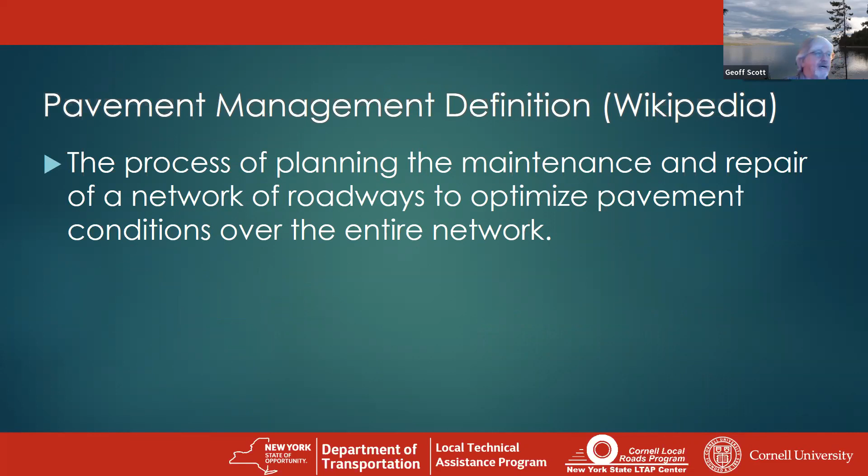Some history, not necessarily history about pavement management itself - people have been managing roads since roads began. But part of the history as to why it's gaining steam was back in 1999, the Governmental Accounting Standards Board, or GASB, issued Statement 34, which basically recommended government agencies report the value of their infrastructure assets on their financial statements.

They recommend basically that you would do this through a historical report for capitalized long-term capital assets. But as we all know, most local agencies don't really have a history going back too far in their records. So essentially they realized that, and they provided another method of doing that. And today we're going to be talking about some of that.

One approach is to depreciate assets over time. The other is a modified approach, which is what we're going to be talking about. That provides flexibility in reporting the value of the assets based on the use of a systematic, defensible approach that accounts for the preservation of assets. Essentially, pavement management and pavement management systems provide the tools needed to evaluate your pavement assets and meet the GASB 34 requirements.

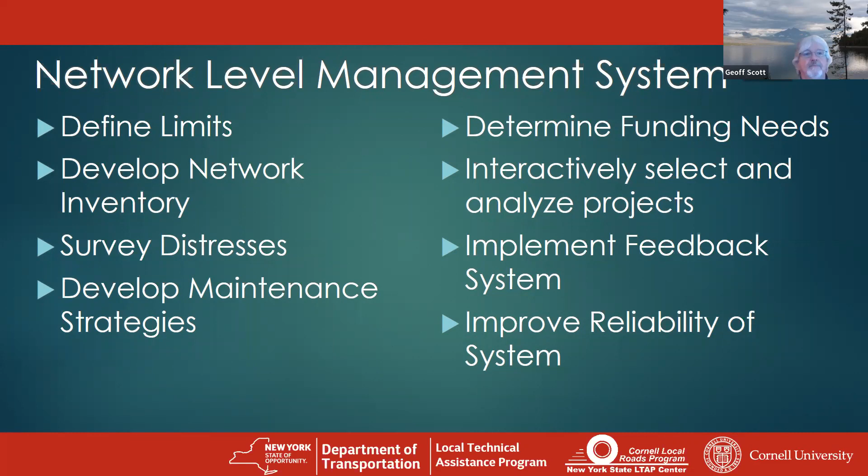As I mentioned, the project level is a little bit more site specific. Once that repair has been selected and scheduled for maintenance, a closer look at the project site specific needs are evaluated. These can be incorporated into the project planning for implementation - again, this is referred to as project level. The network level, as it says, is a network evaluation where it compares itself to itself, while the project level focuses on one individual project at a time.

So as I mentioned, everyone does some sort of pavement management system. A pavement management system is a planning tool used to aid pavement management decisions.

Many pavement management software packages can model future deterioration based on changes in traffic or weather conditions and make recommendations based on those anticipated changes. Measurements can be physical ground inspections, visual inspections from a moving vehicle, or automated sensors mounted to vehicles that measure changes in cracks from inside the vehicle. There's a variety of different types of software out there.

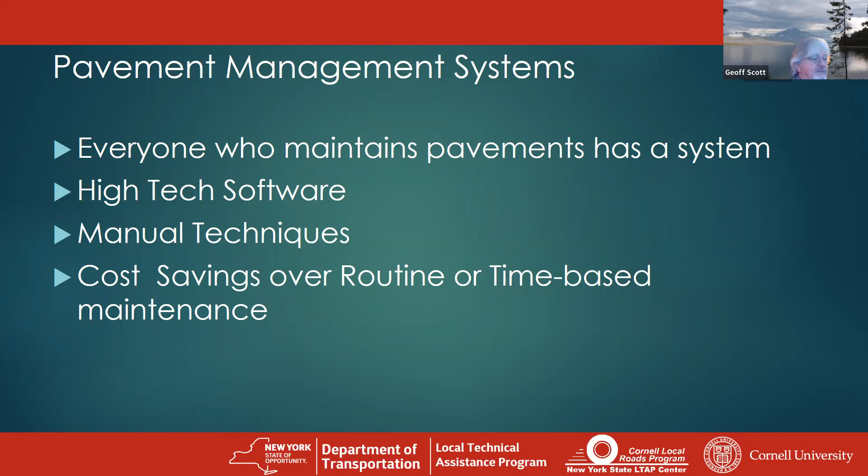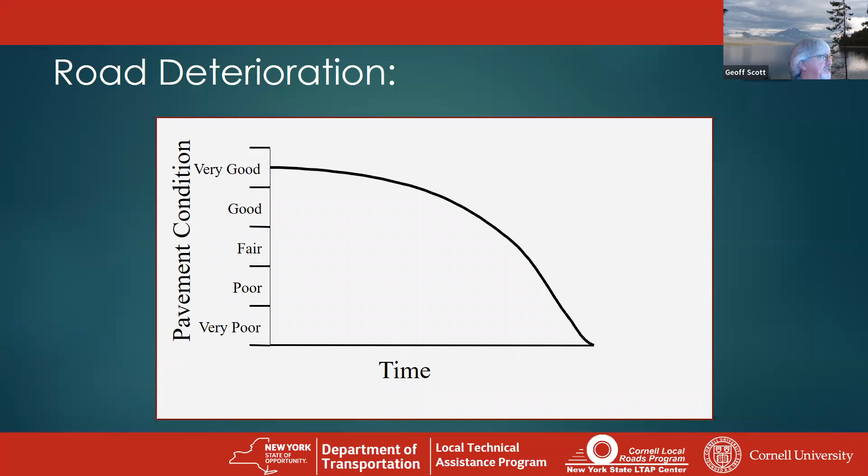We've got road deterioration. As with anything, as soon as you begin to use it, as soon as it's constructed, it begins to deteriorate. The condition of a pavement drops slowly over time. During about 75% of the time, you'll see roughly a 40% drop in quality. Based on the loading, the more frequent loading, the greater stress on the pavement. Surface and subsurface drainage, freeze-thaw cycles, and solar impacts can all cause that pavement to degrade over time.

Once you reach a certain point, cracks start opening up and the problems become more visual. Moisture gets into the base through those cracks and softens it. As traffic continues going over it, it causes the base to flex, which causes the surface to flex, and that's where cracks start. Once extremely soft, you'll start getting potholes, and the more and larger the cracks, the more moisture gets in, and the quicker the deterioration goes. In this graph you can see a 40% drop over the last 17% of that time, because the base is typically failing at that point.

One thing to note: during that 75% of the time, each rehabilitation technique costs about $1 per unit. Once you pass that 75% lifetime, rehabilitation and reconstruction costs increase to 4 or 5 times that per unit.

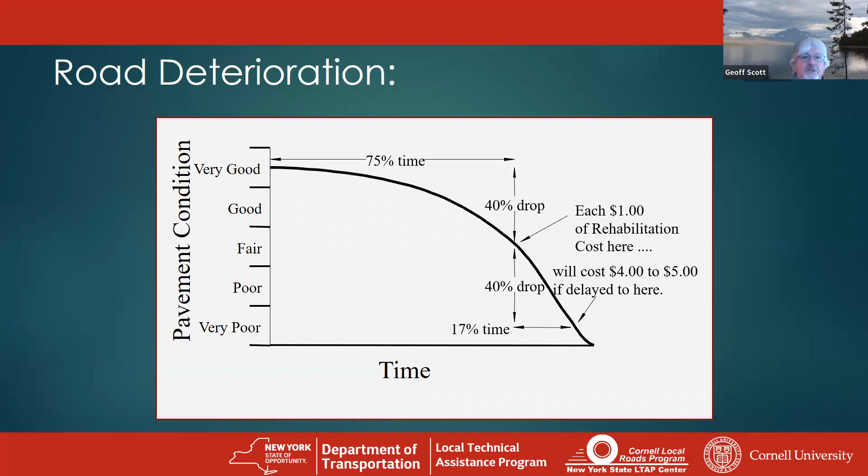So the goal is to try to keep those roads in good shape. Here's the worst first: routine maintenance, preventive maintenance, and corrective maintenance are all the more affordable approaches. When it comes to worst-first, you're letting that pavement fail and then spending a lot of money to fix it, when over time you could have just done smaller repairs.

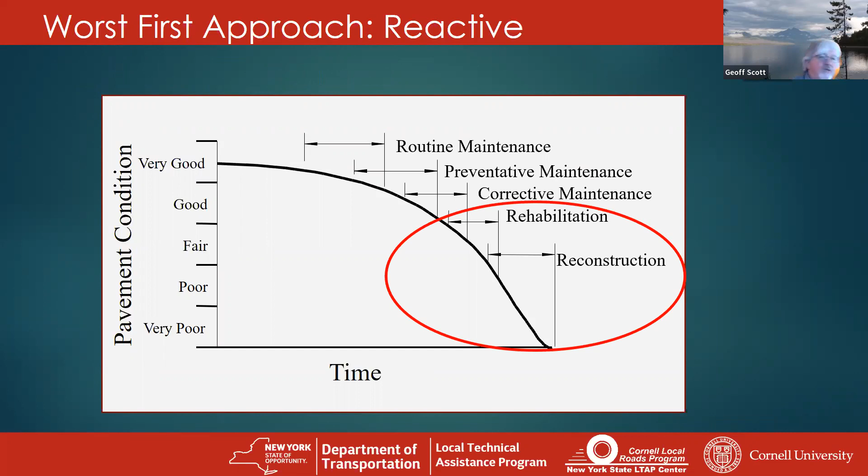To visualize this, we've got pavement condition over time here, and you can see how the original pavement condition goes down. They reach a certain point before it gets to poor, and they do another treatment, maybe a chip seal, maybe a slurry seal, maybe just crack sealing. Then a few more years go by, and they do another surface treatment or whatever it might be. The idea is to keep those roads in good condition.

By doing these smaller work projects, you spend $1 per unit on each of these, instead of 4 or 5 per unit down here once it degrades further. So incrementally, you're spending 3 units worth versus five times per unit here. You get more bang for the buck when you're using the material you have.

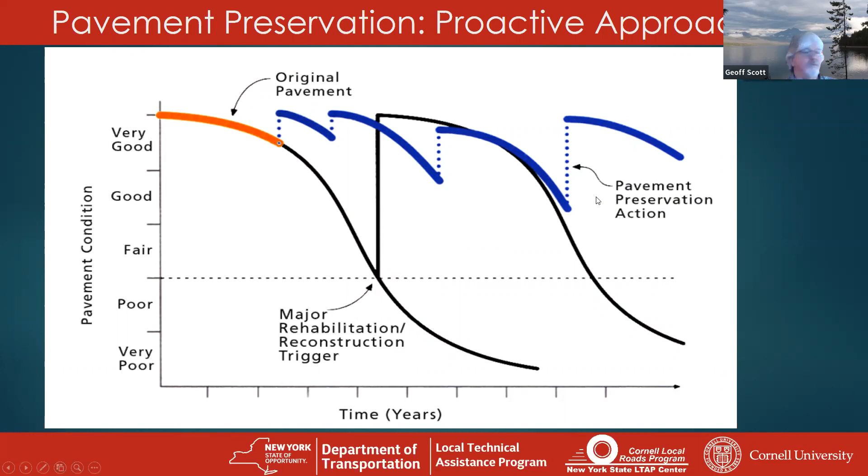As far as cost goes, preventive maintenance is just that: maintenance utilized to prevent an asset, in this case pavements, from failing. By providing treatments to extend the life of an existing surface and prevent it from failing before it reaches the end of its useful life, it's going to last a lot longer and you're going to save a lot more money. If the surface and base have not significantly deteriorated, relatively inexpensive treatments can be used to keep water out of the pavement, prevent oxidation, and maintain good skid resistance on those roads. It also keeps those roads better looking.

Over time, roads are going to eventually fail, but carefully selecting a timely application of a treatment for maintenance can keep the road in very good condition and extend that useful life. It's another way of looking at it, instead of fixing everything or rebuilding every time.

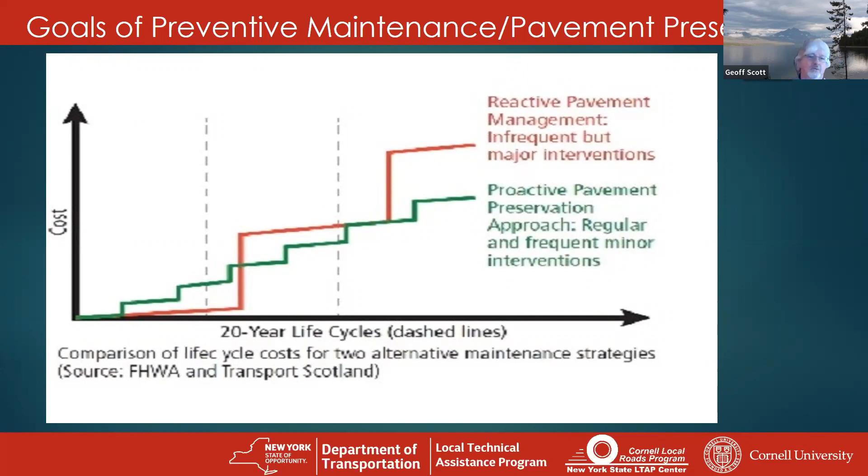I like to correlate a lot of this to having a roof leak. You got a leak in your roof. You don't want to wait till that leak gets so bad that you've got ceilings falling out and electrical boxes rusting and you've got to completely rebuild inside the house. What you want to do is stop that leak at the roof, repair it, and keep everything below it dry. Same concept with a roadway. Once that base gets wet, it starts to destroy and the costs go way up.

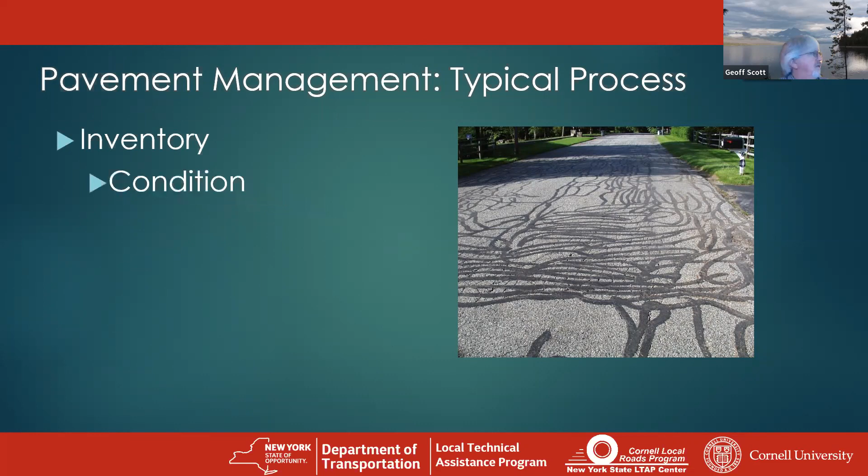There's several tasks required when you maintain a top quality pavement inventory, with the goal of sustaining an overall condition at desirable levels of that network. You'll use pavement preservation, but some of the steps you need to do are basically collect an inventory, find out what you need, do a condition assessment, find out what condition they're in, and then assign repairs.

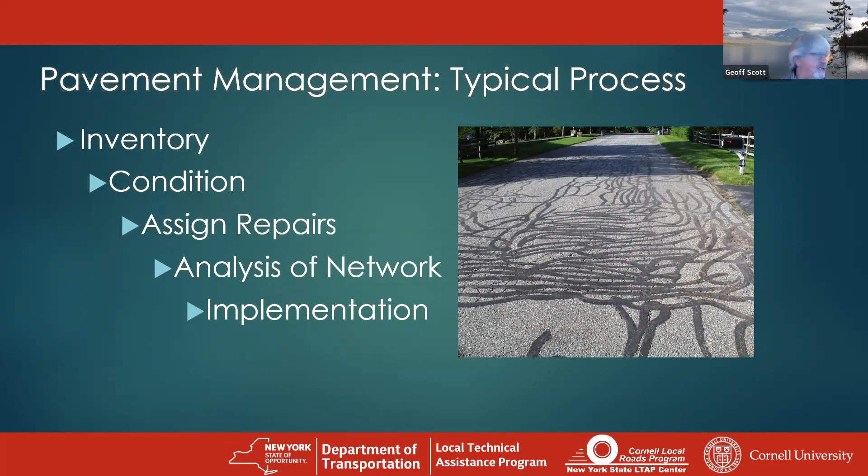Analyze the network, basically do an analysis of all the roadway networks, see what you have, and then you're able to put prices to some of the costs. From there you can start to determine what needs to be done, and then move into the implementation phase. We'll talk about all these coming forward here.

The inventory, you need to know what you have, as I mentioned. Most agencies have an inventory. They're required to submit that to the DOT annually. And if you aren't aware of exactly what you have or what your inventory might be, you can look into the local highway inventory, which is basically maintained by the New York State DOT.

In the past 10 years, they've used a lot of Google Maps and GIS and a variety of other techniques to basically map out and determine what the roads are in each agency.

But in some places, particularly high growth areas, they have developments popping up over time. They might take 2 or 3 years to build, but then those roads are turned over to the municipality. A lot of times the town boards, zoning boards, or planning boards don't necessarily convey that information over to the DPW or the highway department. So going out and doing a physical inspection or checking on what roads you have can be helpful.

It's been found through some of the agencies that some of the roads haven't been recorded on that local highway inventory. If it's incorrect, if you find there are roads that you don't have, let the state know. That's going to impact your CHIPS funding, and that's the important part. We need the funding. Again, check for recent changes.

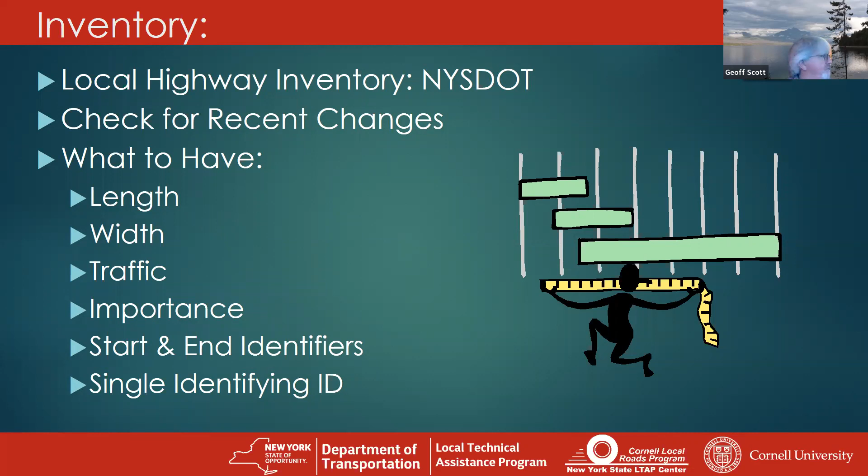Once you know what you have and what you're responsible for, you need to know the condition of each of those segments. Knowing the condition of each section will help identify where the problems are within that network. It will also allow you to compare road segments within the agency relative to each other to determine where repairs should be focused, looking to get the biggest benefit for the network and the community.

The process will help identify the types of distresses in each segment, and there are a multitude of different types out there. Functional conditions such as roughness and skid resistance are also considered. Structural capacity relates to the structure of the pavement itself. All these distresses should be evaluated. We've got a variety of different things, and some of them kind of go hand in hand with others. Depending on the surface type, whether it's gravel or paved, different distresses are used to evaluate.

Some of the distresses we use to evaluate include drainage efficiency, how well the water on and around the road goes away, longitudinal and transverse cracking, alligator or fatigue cracking, edge cracking, potholes, rutting, bleeding, and raveling. Each of these conditions is due to specific types of failures. So if you can identify what your distresses are, it's going to help you determine what repair is necessary.

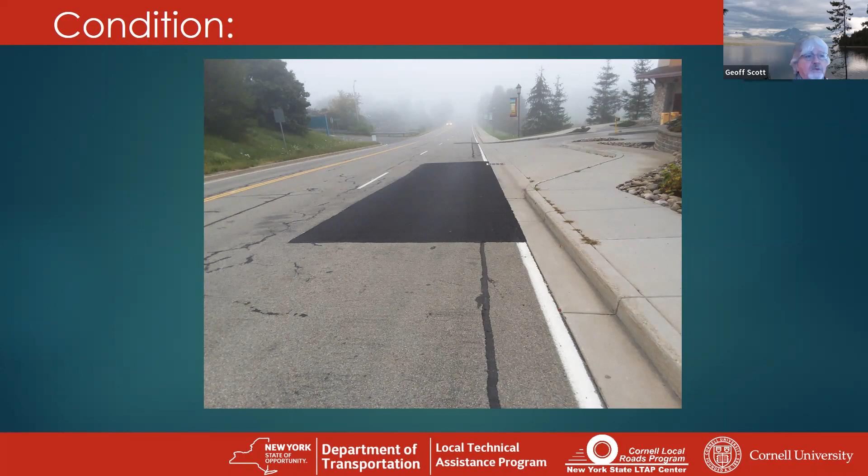That can be a little bit overwhelming, but there are options here. The Federal Highway puts out a distress identification manual for evaluating cracks that tells you the causes of them, how to rate them, and provides numbers for them. It covers concrete, asphalt, and a variety of different things. It's very useful and pretty informative.

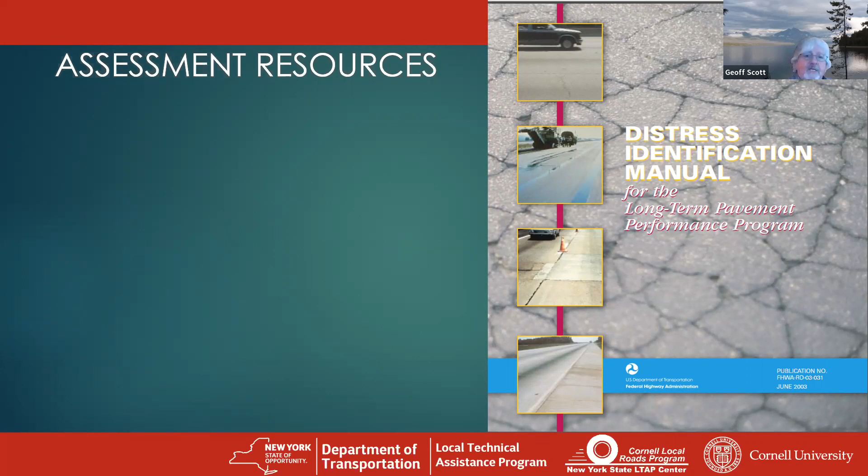And if you haven't got access to that, there's always the option to get a better understanding by taking a pavement maintenance course. This actually goes through a lot of those pavement distresses, pavement repairs, and causes, and gives you an idea of how to maintain your pavements—a useful course. Both of these manuals are available on that link in the handout, so just click the link to download those documents if you need them.

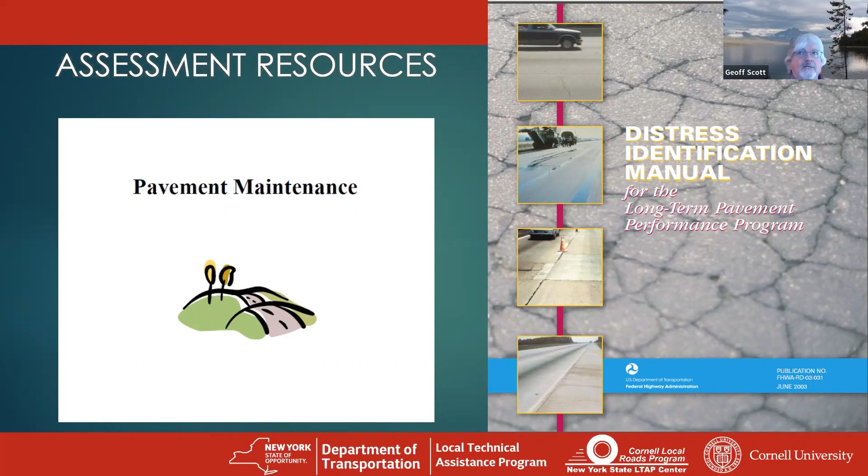Assigning repairs: once you know what types of distresses are present, a closer look can help identify the possible causes of each distress—whether load related, material or installation failures, or failures due to environmental factors. Understanding the cause can help determine a proper repair, and you want to fix the issue that's causing the distress. The greater the impact the proper repair can have on the long-term sustainability of that road segment.

Load related distresses can be improved with greater depth of support, either in the base or on the surface. Material and installation failures may need to be removed, but other practices may be able to correct them to a degree—it really depends on the distress itself and the situation you're in. Environmental issues, typically caused by excess moisture, can be addressed to reduce the impacts of a soft subbase or the deterioration of existing material. Each distress has specific causes.

So once identifying the distresses and looking at each situation, you can select the proper repair for each situation, and you want to try to fix the cause and not the symptoms.

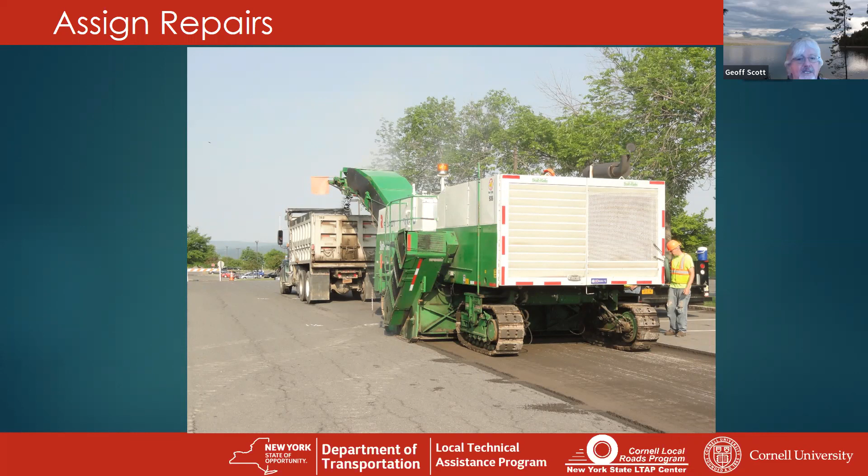Part of setting a priority is part of the evaluation process of necessary repairs. You need to have some sort of priority—you've got to determine which road needs to come first.

And then there's the strategy—whether it's routine maintenance, corrective maintenance, preventive maintenance, maybe an overlay, rehabilitation, or reconstruction—and that strategy is going to drive a lot of it. What we encourage is focusing on maintaining good roads in good condition, so the strategy value for a rehabilitation or reconstruction is going to be lower than the strategy value for a corrective or preventive maintenance. That drives a lot of the priority because you're multiplying that strategy by everything else.

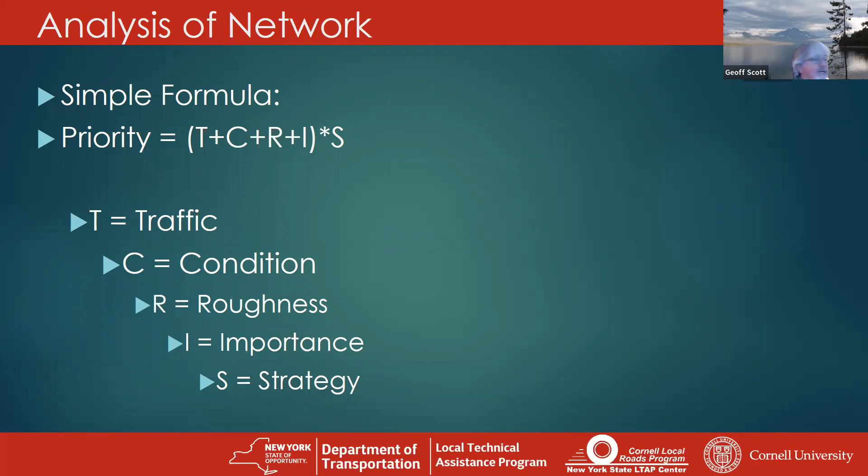It doesn't include any future deterioration, and it becomes extremely complex and a little bit out of hand for most of us. But it's easy to modify. So again, the idea is keep it simple.

Part of the implementation, once the road segment has been prioritized, cost estimates can be applied to each repair, typically done in unit costs, based on a specific unit, whether it's square foot or square yards. Each road segment needing that specific repair can be calculated. So you develop a unit cost, then multiply it by that square surface, and that gives you a generalized cost on what that repair is going to cost for that road section.

Several things go into this. By putting those together, you're going to determine which roads go first. A lot of times setting up that schedule is based on what available funds an agency has, selecting the higher priority roads and adding up the cost until you reach the available funding, which constitutes the first year. Then you go down through the next prioritized roads until you use up the available funding for the second year, and you repeat that for the third and fourth years. That's just a general way of doing it.

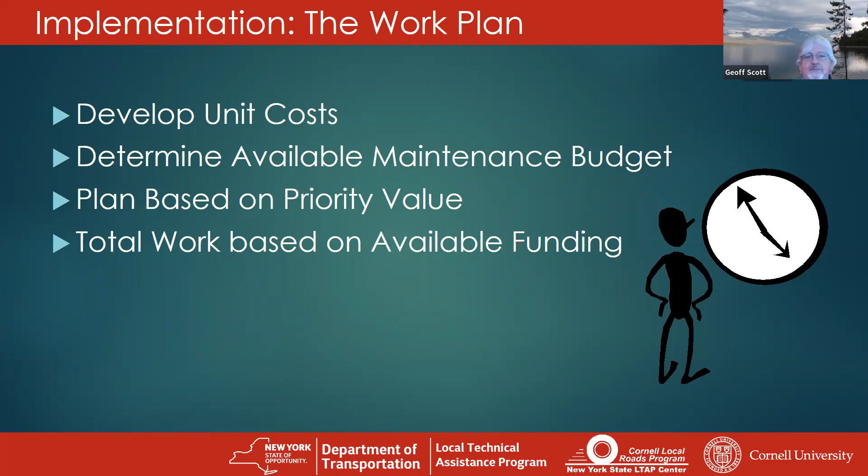Another part of the process is getting the work done. If the work isn't done, the entire process has been kind of a waste. But once you've got documented information - conditions, repair needs, repair costs - it helps you communicate with the board what needs to be done. Communicating what you want to do with the board can be difficult with a difficult board, and sometimes it's not, sometimes you have good boards out there too. But having that documentation, having the objective process in the evaluation, often helps buy-in.

It's a little easier. It's not just you up there saying, I want to do this. This is what the program's recommending, this is what we want to do, and this is why, and this is what it's going to cost. It's much easier for them to understand.

Again, scheduling the work - knowing what you have and what the plan is going to help facilitate the work, particularly with contractors, so you can work with their schedule. Do you want to schedule early? Have a plan in place. If you can get them lined up earlier in the summer, the better. What you don't want to do is wait till the end of the summer to try to schedule work for the current summer. Weather factors can severely change the scheduling, as we saw last year with all that rain. If you wait too long, performing work in the cold can severely reduce the benefits and survivability of a pavement.

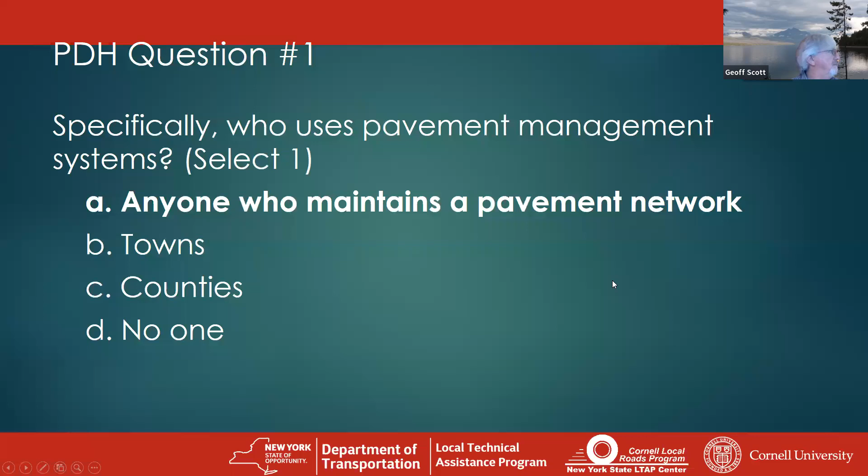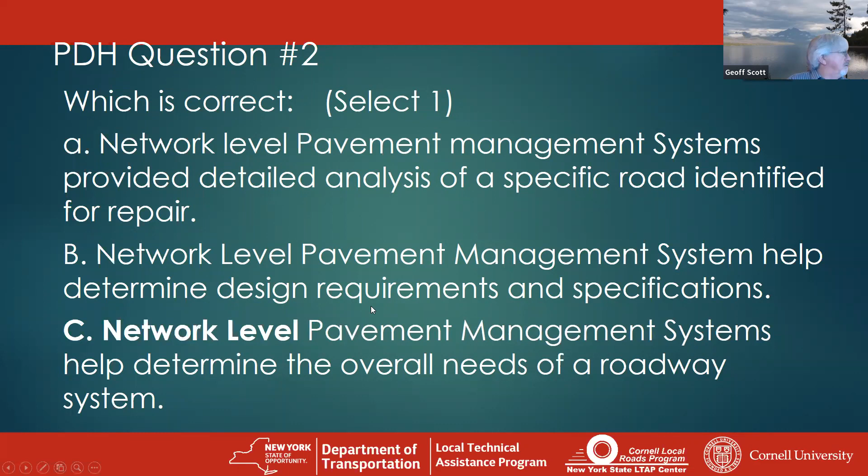So when it comes to funding and dealing with pavement planning, managing, and budgets, common questions you might get from elected officials are basically: do we have enough money? Well, typically that's a no in most cases. How much can we cut from the budget? Ideally none, but they're always looking somewhere. Can we defer pavement maintenance? You definitely don't want to, because the longer you defer it, the worse condition it gets. Once it reaches that rehabilitation-reconstruction area, prices escalate substantially. Then the big question: what repair should we do on this road?

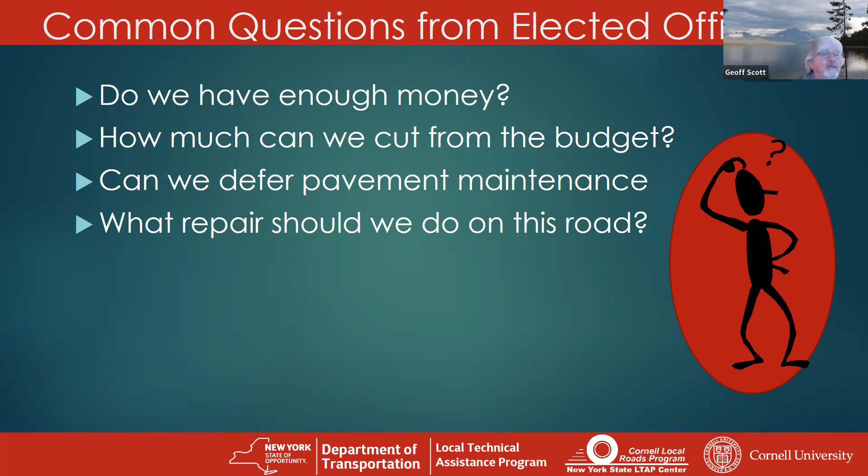And it really depends. You want to let the road tell you what its needs are, not necessarily just pick something out of a hat. And you want to fix the issue and not the symptom.

As far as implementation goes, there are roadblocks, obviously. If you've got a huge road network, as I mentioned, some of them break it into thirds or cut them in half as far as evaluations. But a large road network can be overwhelming a bit. Sometimes it may take additional manpower, and the size of the maintenance needs may require more maintenance than you can actually possibly consider, and that'll stymie it a little bit. Again, you've got to start somewhere. You just don't want to quit.

Complexity of the maintenance needs: if your roads are in really poor shape, they're going to require a lot of complex work and things to bring them up to snuff, and it's going to take a lot longer to get there. But again, you need to start somewhere.

Decision makers' experience: whoever's deciding on repairs to do, if they don't really understand what a reconstruction is and they do an overlay, they may fix the road for a little while, but you're just buying time. That road will fall apart again. If you don't fix the stresses below, they come back.

And other personnel commitments. Again, if you've got a small shop with 3 or 4 people on staff, sometimes it's difficult to get out there and do your road evaluations and assessments and come up with an inventory and that kind of stuff. So there are some issues as far as implementation goes, but again, we've got solutions for that too.

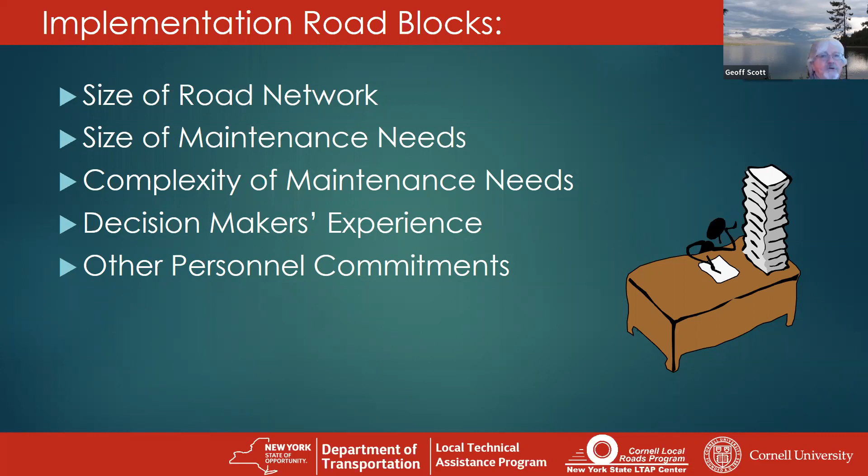What you really want to do if you're responsible for the maintenance of your roads is try to seek out a champion. Try to find somebody or several people on the board that are willing to come out and see what you do, see what roads you cover, see what issues you have to deal with. Get them to understand where you're coming from, and get their support behind you, get them involved.

Another means is basically to demonstrate what the network needs are. We're going to talk a little bit about that.

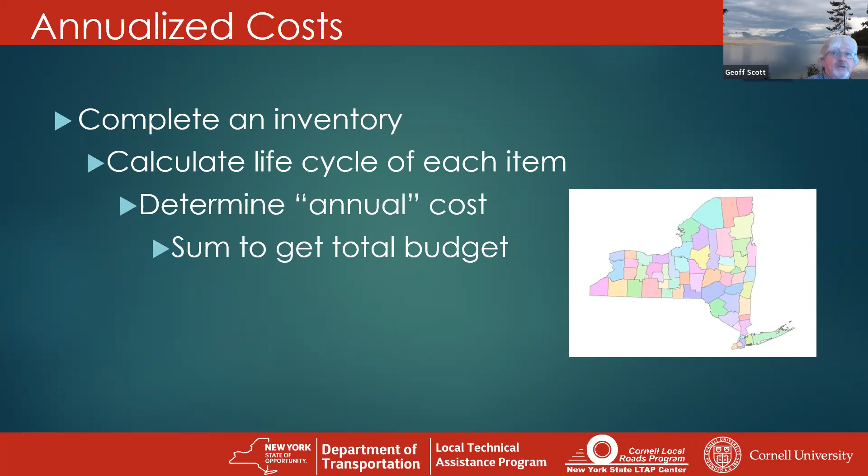So if you want to develop an annualized cost, basically try to figure out how much it's going to cost on an annual basis. You need that inventory, you've got to complete that. Calculate life cycle of each item, determine annual cost, sum the total together, and from there you'll get your annual cost. It seems easy, but it's a little bit more in depth, and we'll go into an example here.

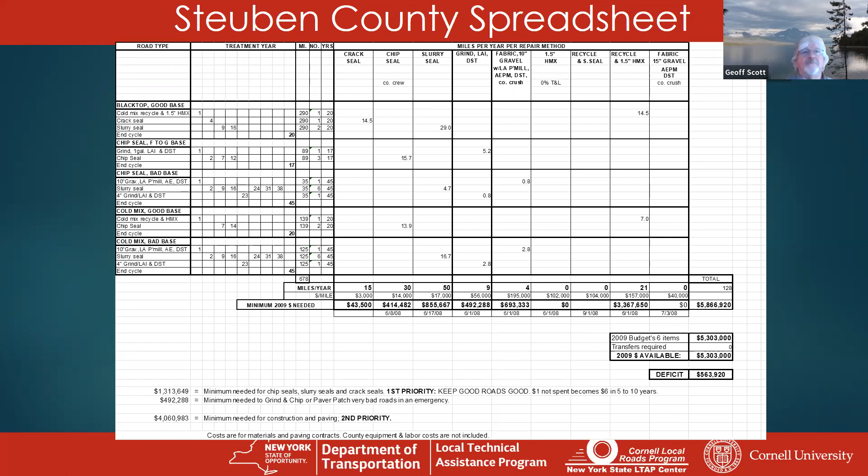So it's basically something they can share with their board. It identifies what their needs are, identifies what their deficiencies are, and identifies the plan. Getting all that on paper and documented makes it a lot easier to discuss over time. This approach can be used for all of your assets — obviously roads, but also bridges and culverts, signs, guide rail, equipment, and miscellaneous items. Again, it's about determining what you're going to need and being able to budget for it each year.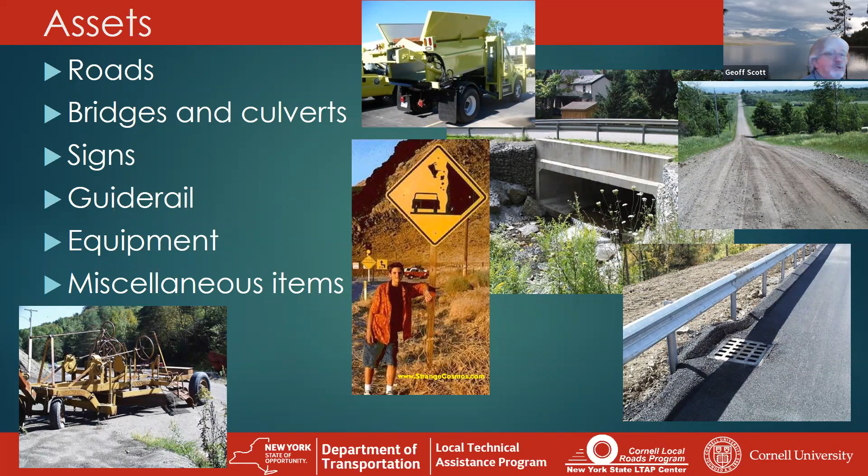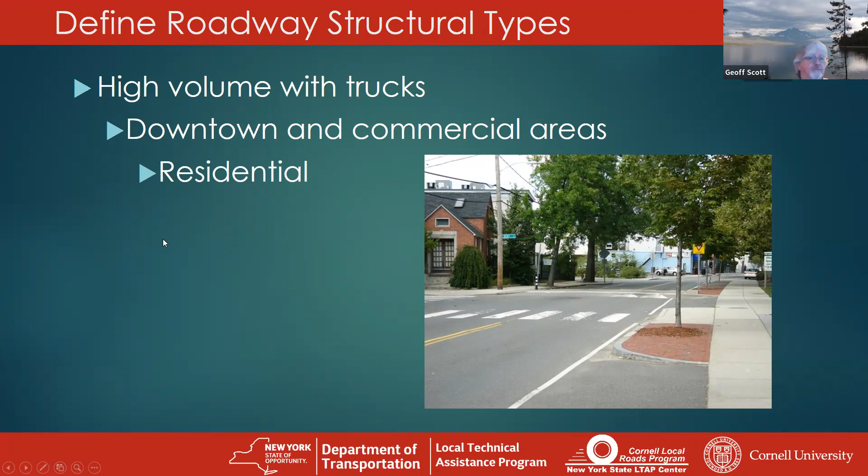What they did was define road structural types, since each one has a different strength and design. As an example, we're going to use high volume roads that have trucks, but other options might be downtown commercial areas or residential roads. Each one needs a little bit different type of design. So using those numbers from before, we've got a high volume road with trucks on it.

Again, we're developing an average cyclic plan here. The cycle life is approximately 35 years. These are the treatment years for each of the repairs: crack repairs in year 5, patching year 6, wearing course year 7, crack repairs again in year 9, overlay in year 10, crack repairs in year 15. You can see the years basically go 1 year, 1 year, 2 years...

Then they go through an overlay in year 10, so 1 year, and then they go back 5 years, doing crack repairs and patching at the same time. Then they put a wearing course over it, and they can recycle the surface and go back. That's their cyclic maintenance plan over that 35 years.

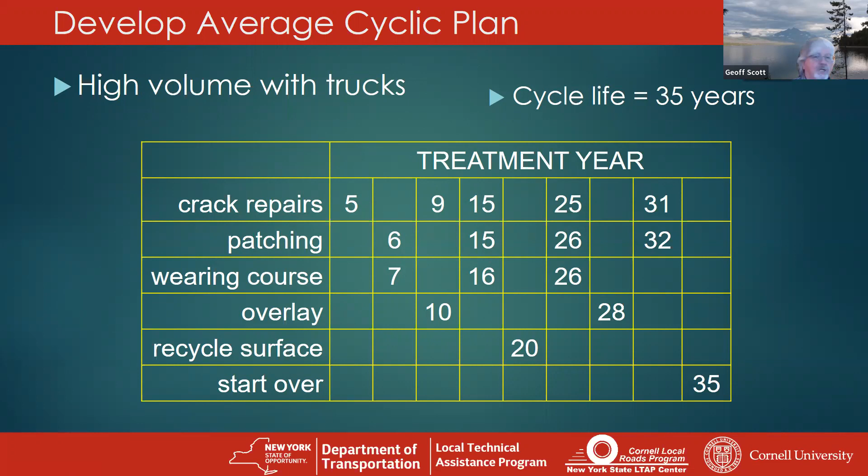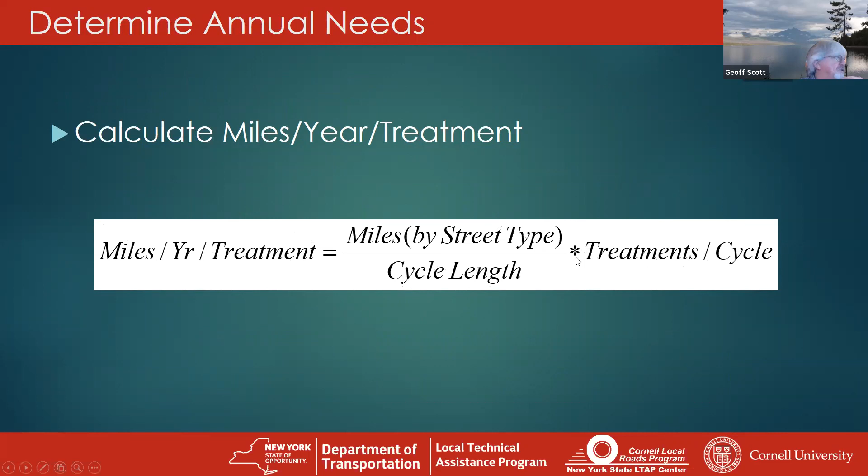From that, you can actually put costs to it. You want to calculate how many miles per year per treatment. The equation is: how many miles you've got by street type — again, roads with heavy trucks — what's your cycle length (35 years), and the number of treatments during that life cycle, multiplied together.

So what they've done here for high volume roads with trucks: 30 miles with a 35-year cycle. For those roads, you've got 5 crack seals averaging 4.3 miles a year, patching 3.4 miles, wearing course 3 times, overlay 2 times, recycle surface 1 time, reconstruction 1 time — all expressed as miles per year, breaking it out over that 35-year period.

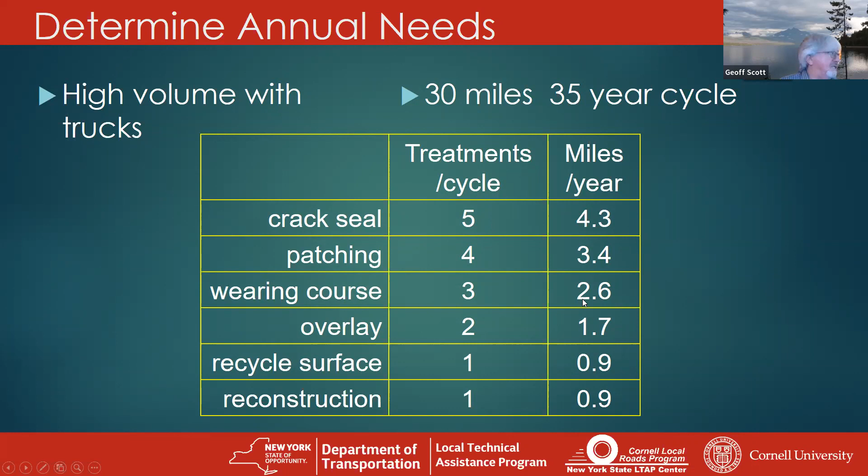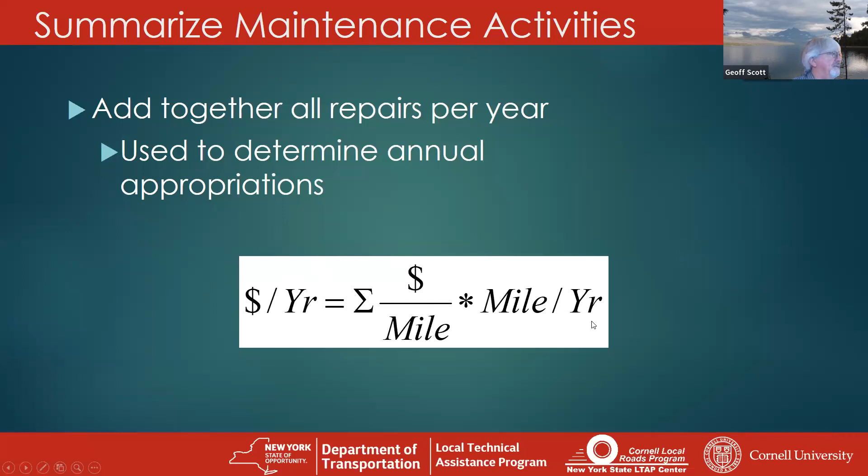From that, you can add together all the repairs and use this to determine your annual needs and appropriations — determining the cost per year. Then you sum up the cost per mile and the number of miles per year, as shown in this table: treatment cycles, miles per year, and a unit price for each of these costs, which you multiply together.

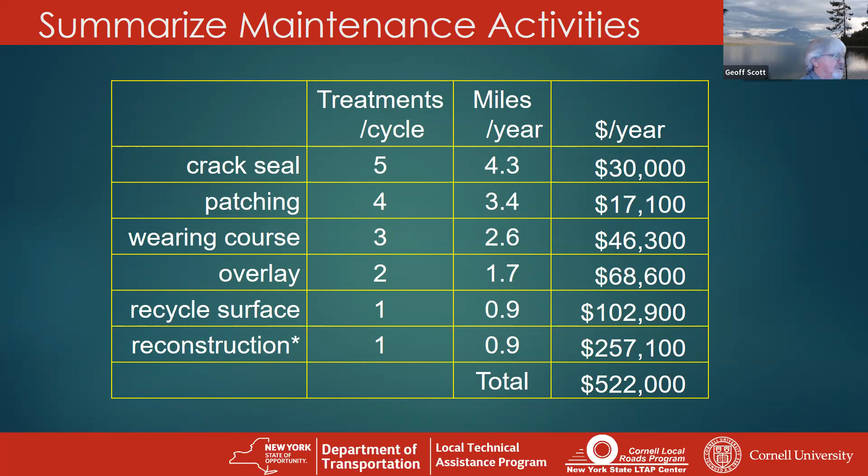The unit cost times 4.3 comes up to $30,000 a year. Patching is 4 times that unit cost of 17, and it kind of goes down as you multiply the costs. It determines that for that road type, they're going to need $522,000 a year to maintain that road type annually, for an estimated 35-year life cycle. So this is the annual funding necessary that they're going to need.

As I mentioned, there's other assets. While there's multiple different types of software out there that can help an agency, we offer this Cornell Asset Management Plan. Basically, it's a program that's available to pretty much anyone. It is a snapshot, it doesn't do any kind of predictive what's going to happen in the future. It just evaluates what the roads are now. Again, they could change with a heavy storm. But it collects the inventory, condition assessments, you can assign repairs within it, diagnose the entire network based on those repairs and the needs of it, and then develop a plan based on that simple formula we showed earlier.

The software is available to anybody that's interested. Just call us, and it's available for $90, I believe that's the cost.

Another option is our summer intern program. If you've got an agency that's a little short on manpower but still would like to get into something like this, we have a summer intern program where the intern essentially works for the municipality. It's a 10-week program, we provide training. This year the training will be May 23rd to the 25th, held at Cornell. Over the course of the 10 weeks that summer, we'll provide technical assistance training, do site visits, all kinds of things, and we're available for phone calls and emails to provide that support during the training, for both the agency and the intern.

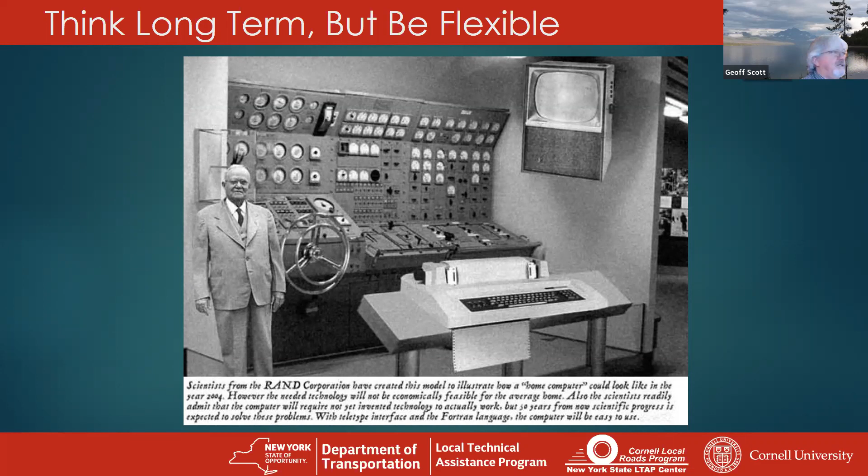So just to go through a review - there are multiple benefits you can get by implementing a pavement management plan. As we mentioned a few times today, it's efficient use of limited resources - you want to get the best bang for your buck with your limited available funding. You've got documented results, an objective evaluation, so you can actually substantiate the results you're finding. It's all based on preset parameters, there's no 'I want this, I want that' in it. It helps you determine the condition of your roads, giving you a better idea of where you stand and what you need to focus on.

Having all this information, having that documentation, being able to substantiate your results is going to provide better communication with the board, but not only the board, but also the public. We've had participants in our camp program where the town got calls, and the students put together reports - they put the reports right on their website. So when people complain or want to know when their road's getting done, they just send them to the report and say, this is how it is.

At least having a plan is going to help better communicate to the community. By updating and maintaining it, you'll have better information on your network, its needs, and the costs. Because you have substantiated results and know your conditions, you'll get better cooperation, not only from the board, but when looking for funding from the state or federal government. If you've got a plan and can identify where you're going to spend that money, your requests will rise to the top over someone who just says, I need $100,000 for paving. Specifics make them more willing to grant additional funding.

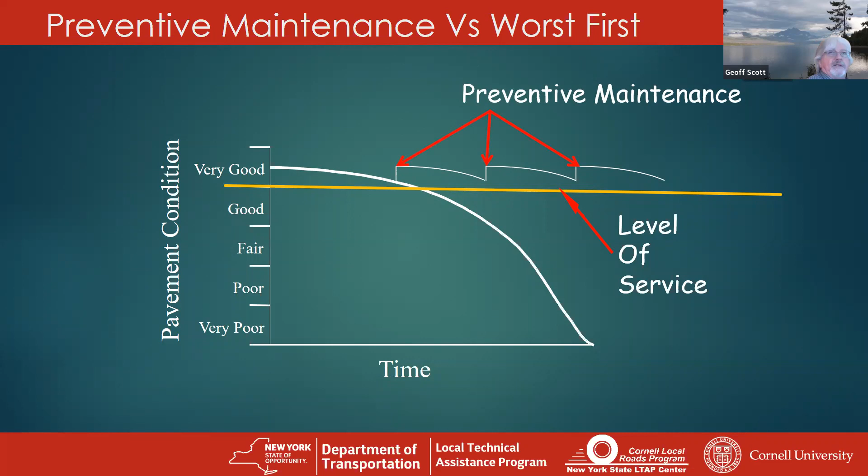So again, looking at pavement worst first, we want to maintain a good level of service where the road is useful, safe, and efficient. Preventive maintenance is basically the best way to do it. You do those cheaper, dollar-per-unit approaches, keeping roads in better condition, as opposed to letting it fail and then spending a large sum of money. It's five to six times the unit cost for those approaches.

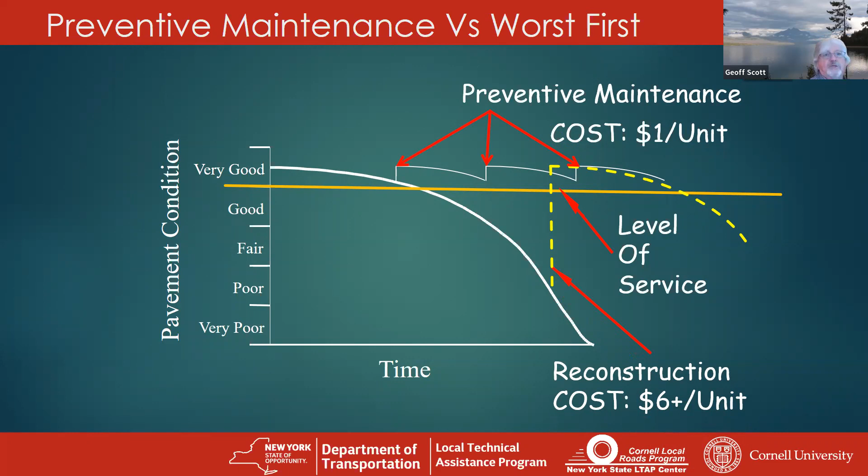So I guess we'll hit another PDH question. We're getting close to our time if we haven't passed it. Question 3: pavement preservation, select the incorrect answer.

A, looks to keep good roads in good condition. B, extend the life of existing pavement structure. C, improve the overall quality of the network. Or D, is more costly than repairing the worst first.

If you've been listening, that should be an easy one. We're about 50%. We'll give you guys a few more seconds to get those answers in. Remember, it's select the incorrect answer.

Yeah. Yeah, it looks like I might have missed the mark. D is the incorrect answer. I guess I might have missed that as we were going through.

Pavement preservation's goal is to be more cost efficient. It does look to keep good roads in good condition. By doing that, you extend the life of the existing pavement, and by doing that, you improve the overall quality of that network. Again, the approach is a cost-efficient one. The idea is you're going to get the best bang for your buck by applying funding where it's needed based on the conditions of the road.

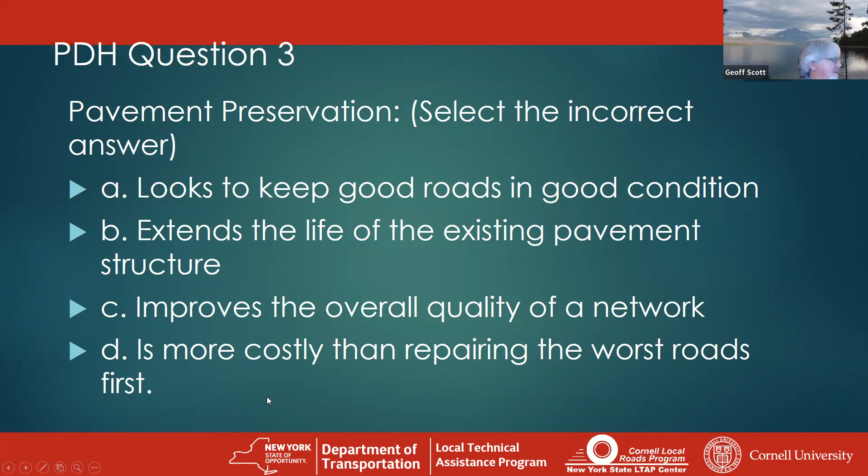All right, we'll move on to the next one. Pavement preservation. No, that didn't help. Doesn't work. There we are.

Again, which is not a benefit. I should better word these questions, I guess. You guys, a few more seconds to get those answers in.